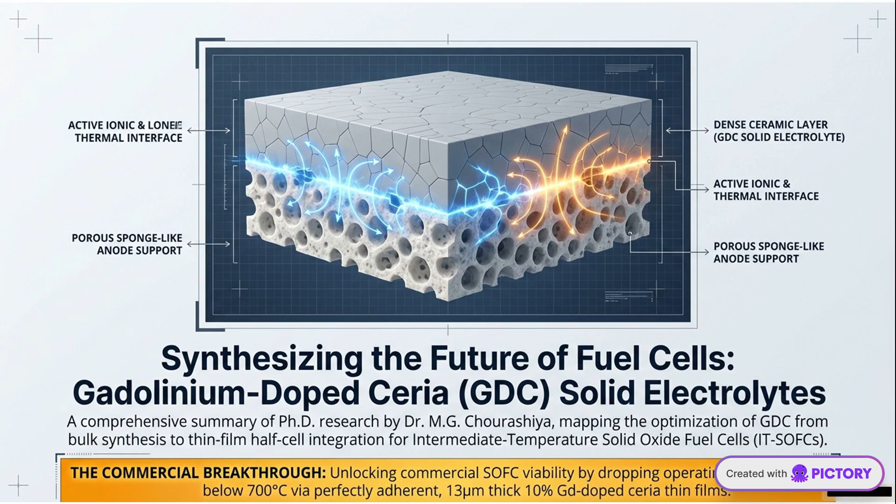Gadolinium-doped ceria (GDC) is paving the way for the next generation of fuel cells. By optimizing GDC from bulk synthesis to thin-film half-cell integration, we unlock commercial breakthroughs in intermediate temperature solid oxide fuel cells. The challenge in SOFC commercialization lies in overcoming thermal bottlenecks.

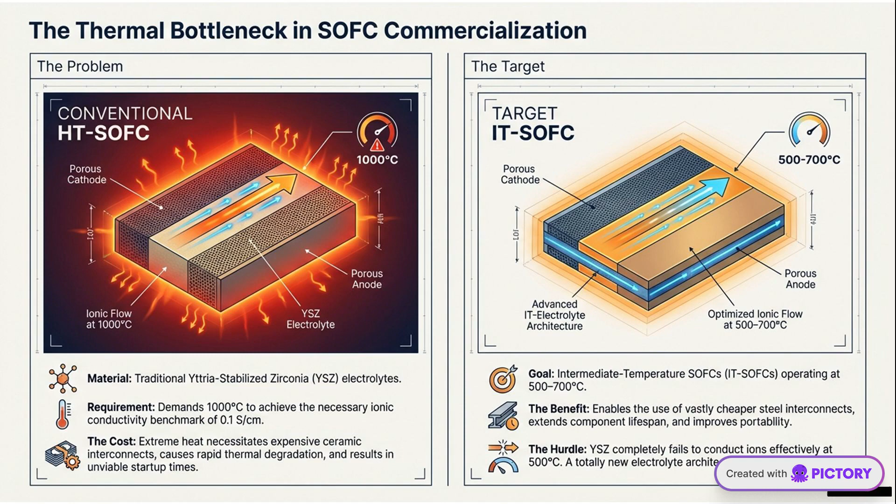Conventional SOFCs require high temperatures, but our target IT-SOFCs operate efficiently at lower temperatures, enhancing performance and lifespan. Gadolinium-doped ceria offers large channels for oxygen ions, making it ideal for SOFCs. However, high conductivity can lead to short circuits, necessitating precise control over its operation and synthesis.

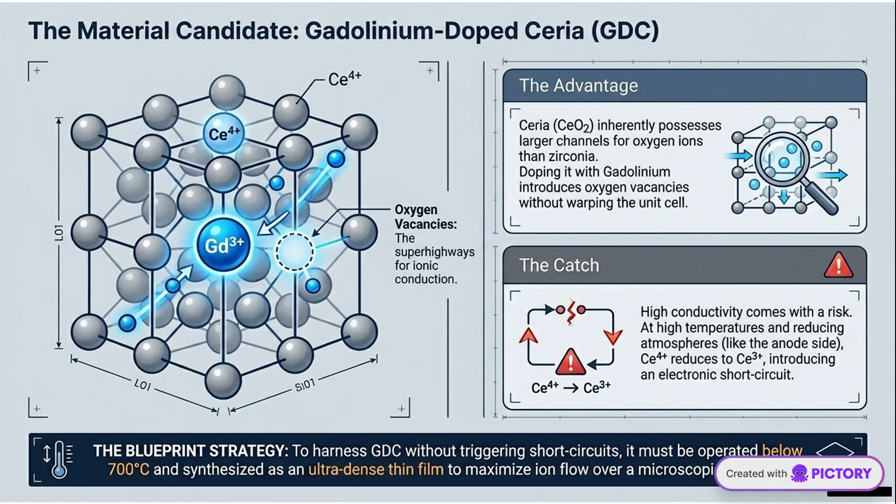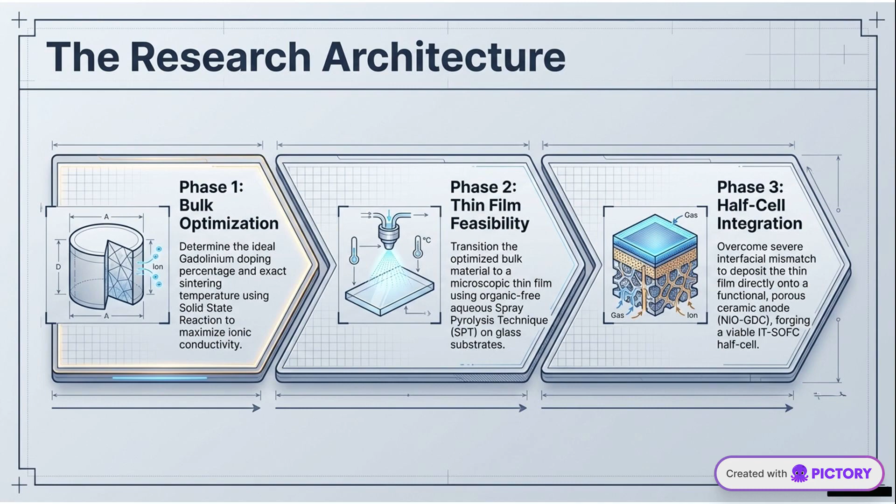Our research architecture involves three phases: bulk optimization, thin-film feasibility, and half-cell integration. Each phase is crucial for maximizing ionic conductivity and ensuring successful integration. In Phase 1, we focus on bulk synthesis using solid-state reactions. By optimizing the gadolinium doping percentage and sintering temperature, we enhance ionic conductivity and material density.

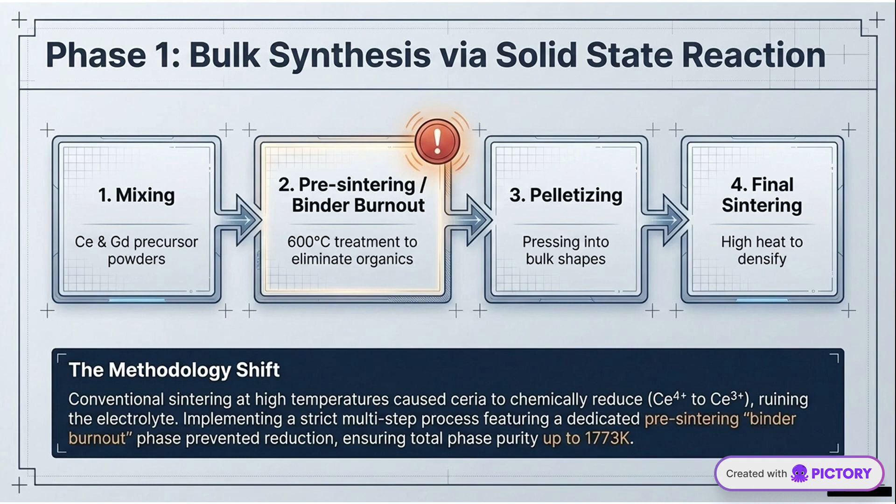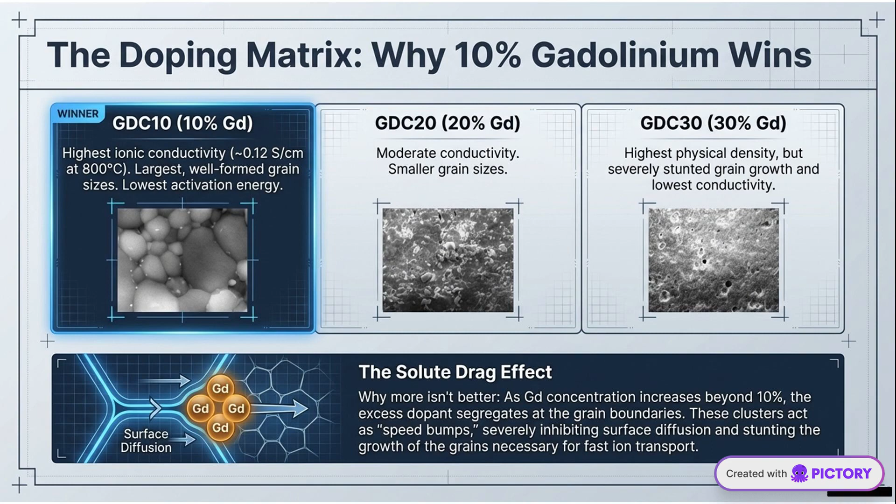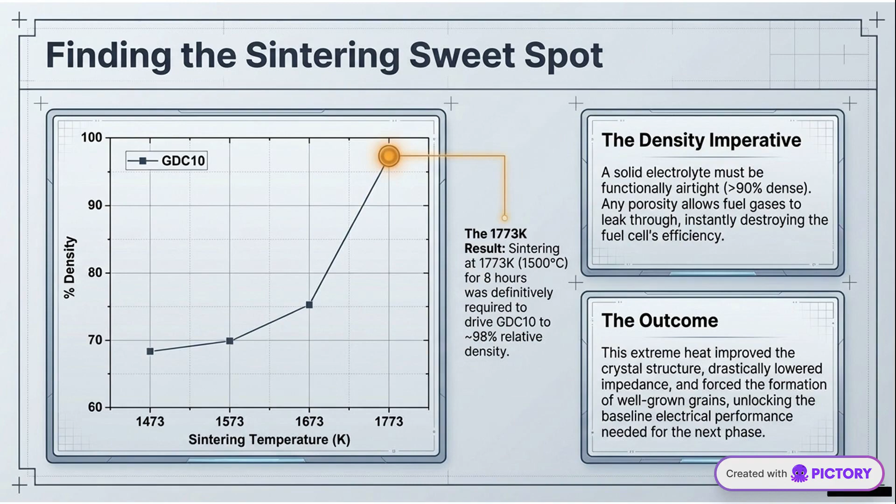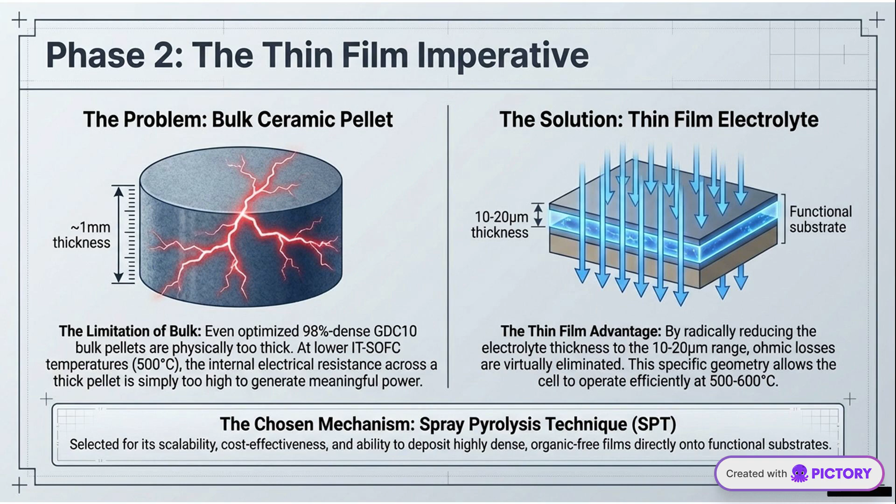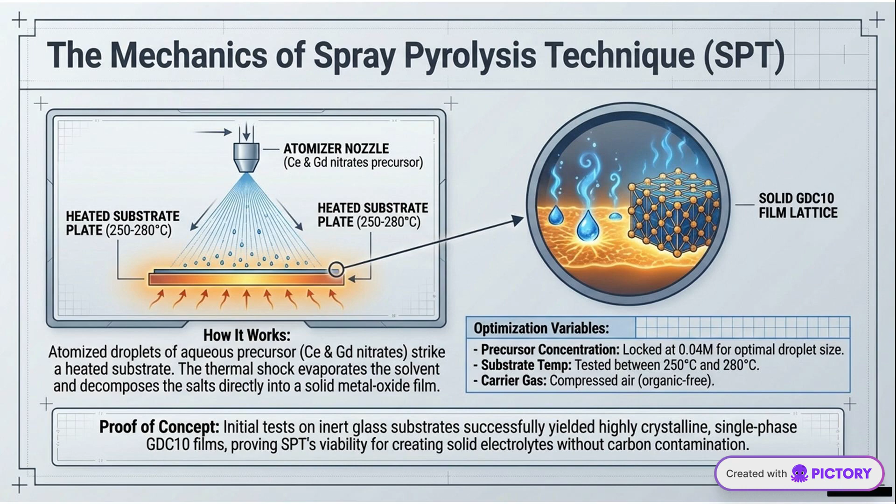Transitioning to thin-film electrolytes addresses the limitations of bulk ceramics. By reducing thickness, we improve functionality and efficiency, paving the way for advanced SOFC designs. The spray pyrolysis technique allows for the creation of high-quality GDC-10 films. By optimizing variables like droplet size and carrier gas, we achieve dense, crystalline structures without carbon contamination.

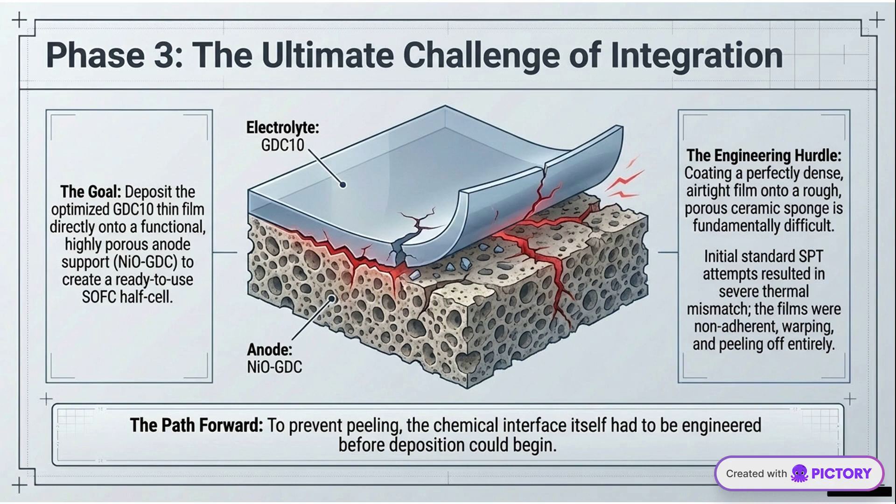Phase 3 tackles the challenge of integrating GDC-10 into functional half cells. By engineering the chemical interface, we prevent peeling and ensure a robust, adherent film. The precipitative deposition method revolutionizes integration by modifying surfaces, enabling low-temp wet deposition, and phase-lock sintering. This ensures a durable and cohesive structure.

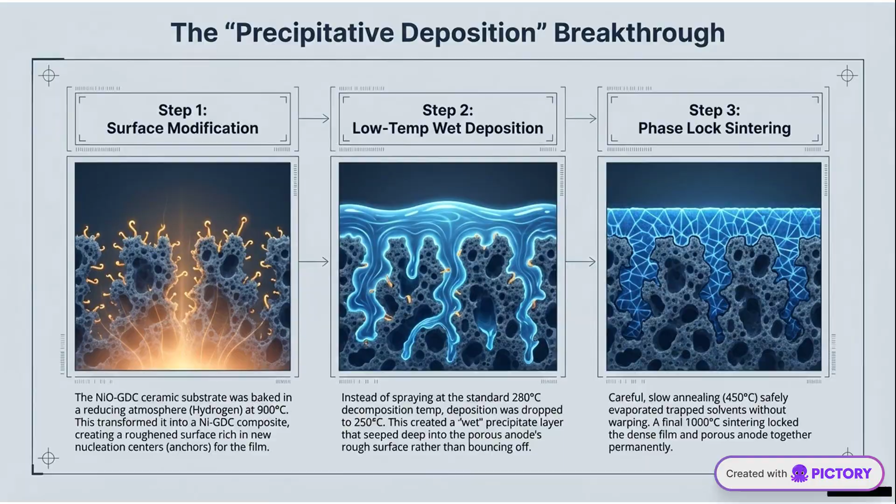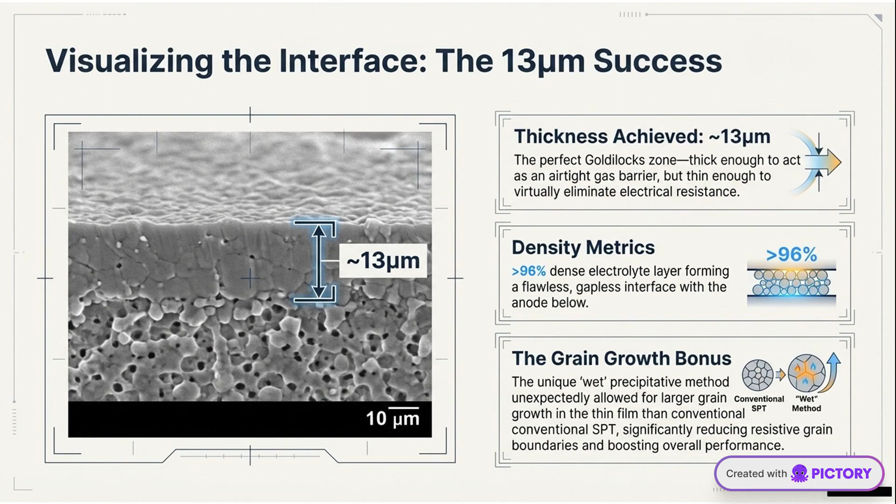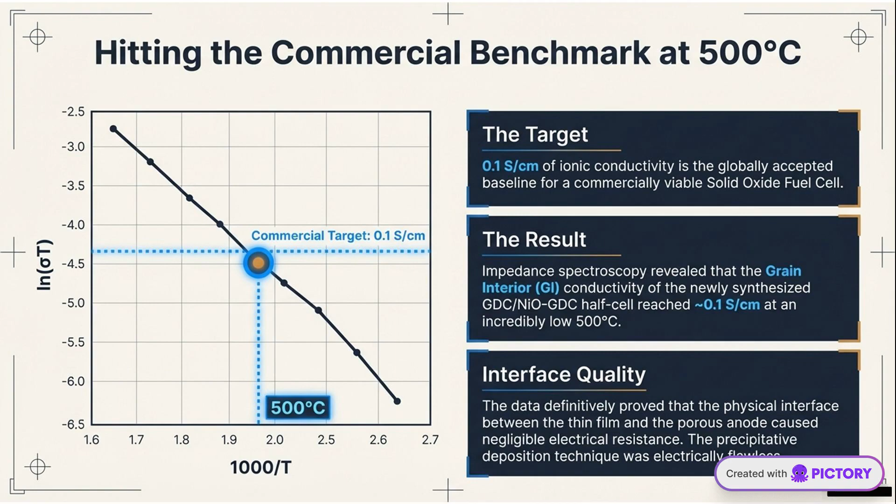With a thickness of approximately 13 micrometers, the electrolyte layer acts as an effective barrier while minimizing electrical resistance. This balance is key to enhancing SOFC performance. Our GDC half cell achieves the commercial benchmark of 0.1 S per centimeter at 500 degrees Celsius. This success underscores the effectiveness of our interface quality and deposition techniques.

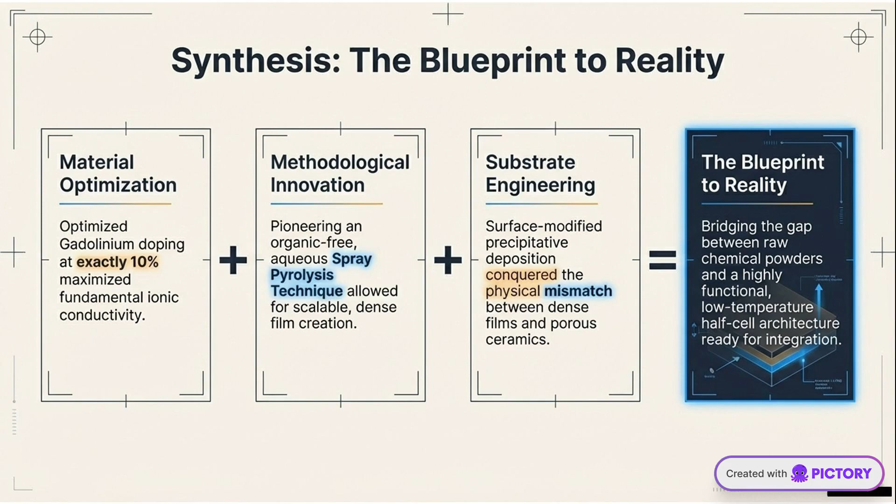By optimizing material, innovating methodologies, and engineering substrates, we bridge the gap between raw materials and functional half cells, making GDC a reality for commercial applications. The successful development of GDC-10 films and half cells marks a significant milestone. This blueprint offers a scalable solution for the commercialization of intermediate temperature solid oxide fuel cells.